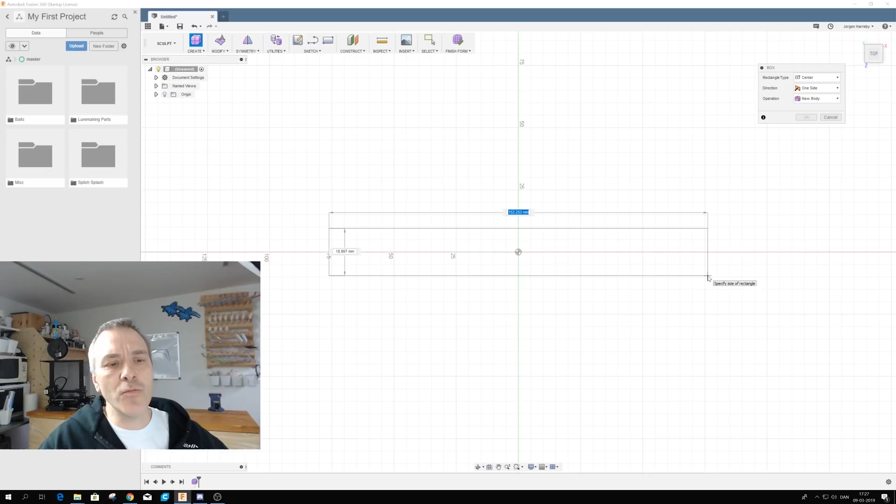Okay, like that. The reason it should be the size of the lure you want to create is that you can scale up and down, but if you make the details on the lure and scale too much down, they might end up too thin to actually cast. So it's a good idea to make them in the size you want, and then afterwards determine if it's possible to scale up and down, or maybe change the design a bit so you can scale it down to the right size.

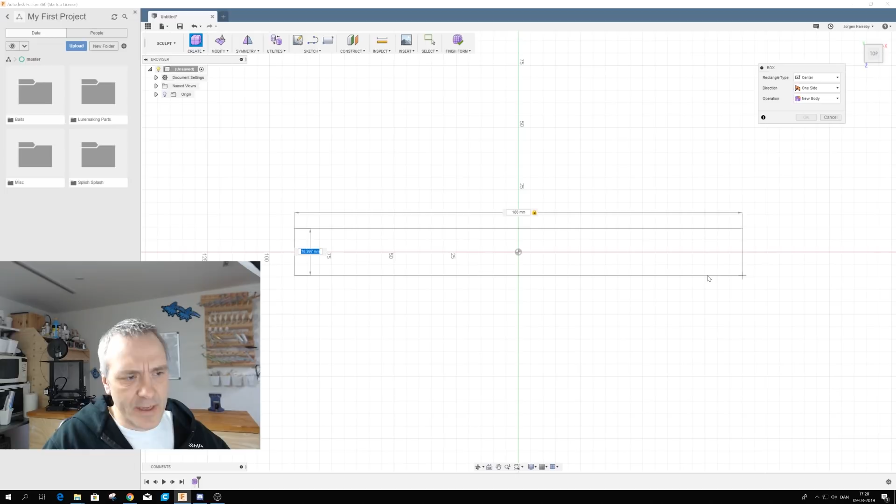For this lure, which is meant for pike fishing, I actually want it to be around 150 millimeters long, but as I need to reduce part of it along the way, I'll start out with a shape that is 180 millimeters long, and the width should be something like 20 millimeters, I think, for starters anyway.

Okay, and once I've selected those two, it will actually draw my shape here, and it will allow me to set the height, and I'll just set that to 20 millimeters as well, like that. Then I'll go to the property box up here.

As you can see, it has the measurements I just entered, and it also has something about faces. With faces, it's talking about the sections of the lure, the sections you can manipulate when you are shaping it.

One thing you can see is that the more sections you have, the more details you can add. The less sections you have, the easier it is to obtain a nice smooth shape. So you need to figure out where in between you want to be.

With a lure like this, I will start out with, I think, 10 length faces. In the width, I only need 2, as I just need the 2 sides, and I don't need that many details in that direction. The same goes for the height, so 2 on each of those.

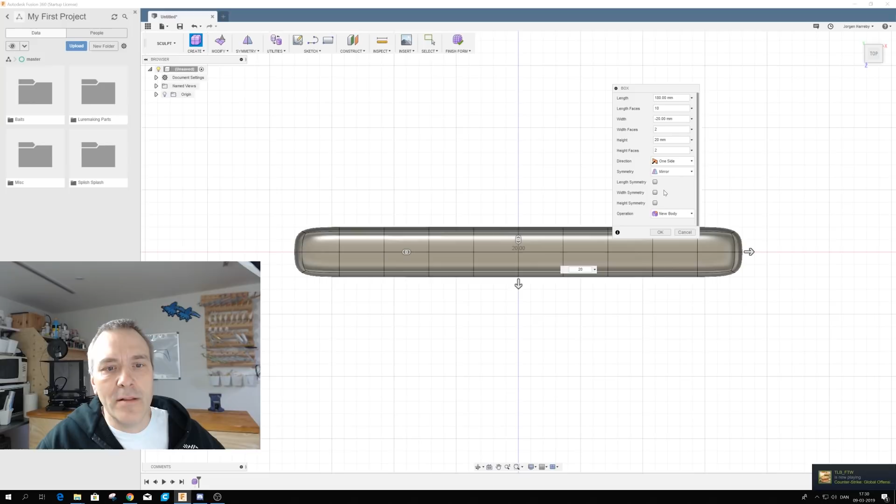Then there comes a very important part, which is to add some symmetry. Its only choice is mirror, and I need the lure to be mirrored so both sides are the same, and that is what's called width symmetry. As you can see here, it has now added a green line down the center of the shape, and that means that what happens on one side will also happen on the other.

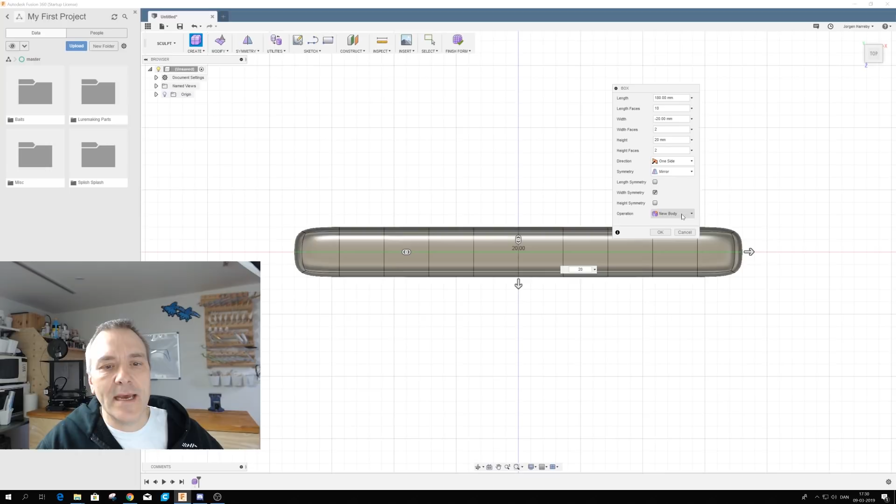Okay, and I need it to be a new body. So now I'm done, and what I have here is the starting point for my lure, the thing I can shape. So this squared cigar is ending up as our shad. Okay, and now we can start shaping the form here.

The way you do that is that you select something. You can select a single face or a section. You can select two by holding shift down while clicking the other one. You can select the lines, the crossing of the lines here, or you can select entire areas like this.

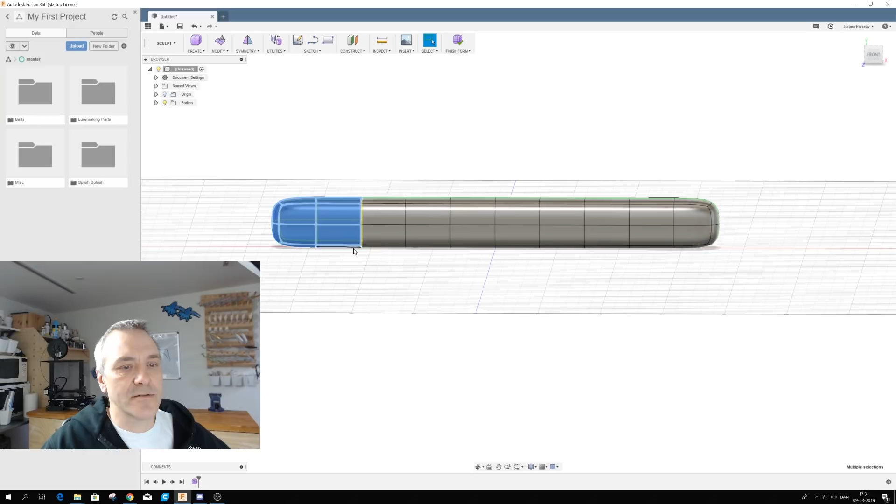Once you've selected something like this, you can right click and choose edit form. This will give you this, I don't know what to call it, an action tool or something you can use to manipulate the section you've chosen. There's a lot of different options, and actually there's probably options I haven't even figured out yet.

But if you just take some of the simple ones, like the arrow, you can use that to pull the section up and down. And as always on computers, you can go back one step by using Control Z. So you can always just try and go back.

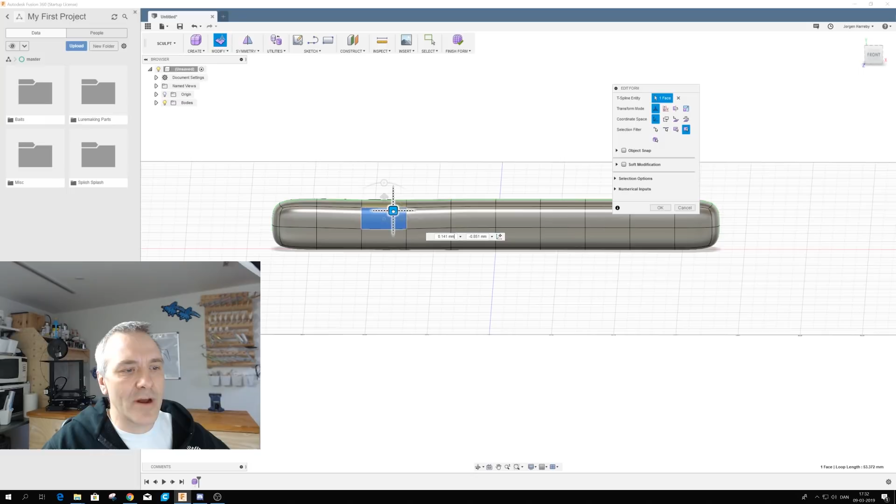You can also move it in the length direction, of course. You can use this one to kind of grab it and move the whole around without reshaping it. There's also this one which will enlarge it, or you can enlarge it in one direction only, like that.

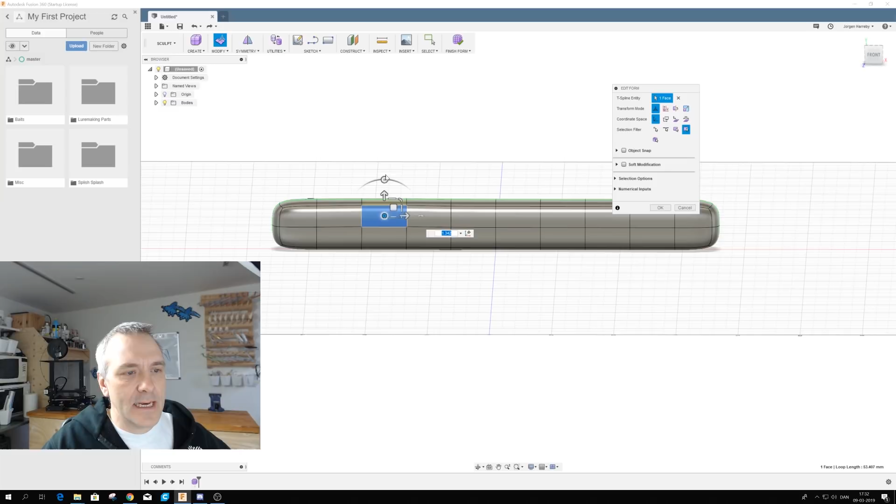And there's this one which is also kind of enlarging it. Some of them seem to work a bit alike. And there's this handle which is twisting it. As you can see, if I turn it around, you can do the same in the other direction.

This is actually a good way of showing how the symmetry works, because if I grab this one and pull it out, you can see it happens in both directions. So I only need to work on one side, and it doesn't really matter which side I work on. I can switch between sides whenever I like along the way. Control Z to go back.

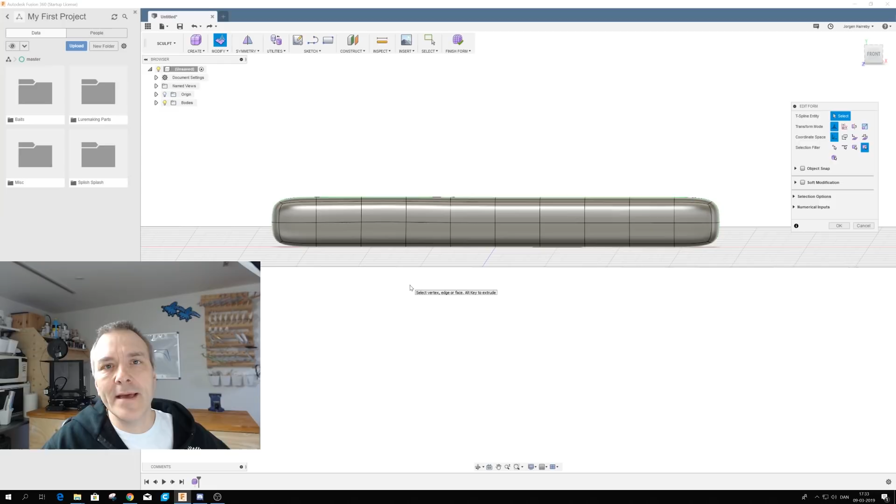Okay, so now we know how to manipulate the shape here into what will be our shad. I'll just move this box out here. And one thing you should also remember along the way is to save your progress. When you've reached a point where you're satisfied with what you have, always save.

This is actually a good point to make the first save, because you can always get back to the save. Even though you save something afterwards, you can go back. So this is kind of like versions, and it's nice to have a starting point version to go from. Okay, so I'll just press Control S to save here, and I'll call this one...

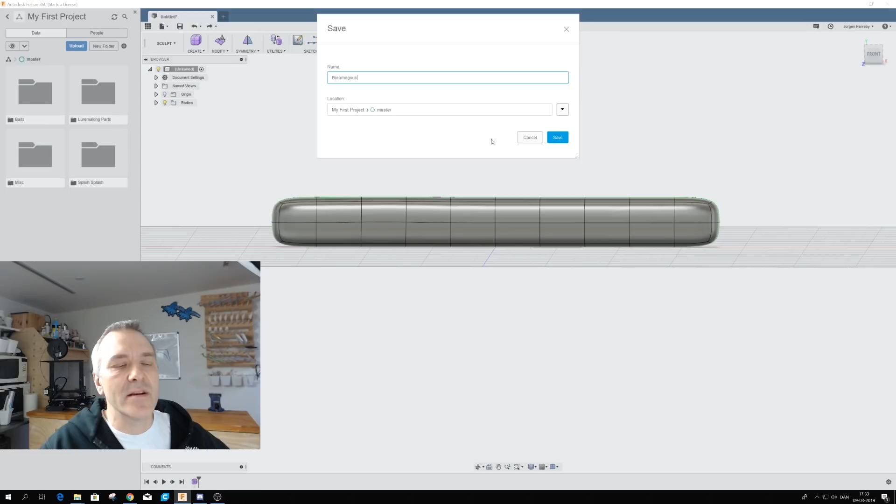As I mentioned earlier, even though I wanted the bait to be 150 millimeters long, I made it 180. That is because I want to reduce some sections of the form here to enable me to make more significant changes in those areas. One of those would be here in the third section from the head, where I want the gill plates to be.

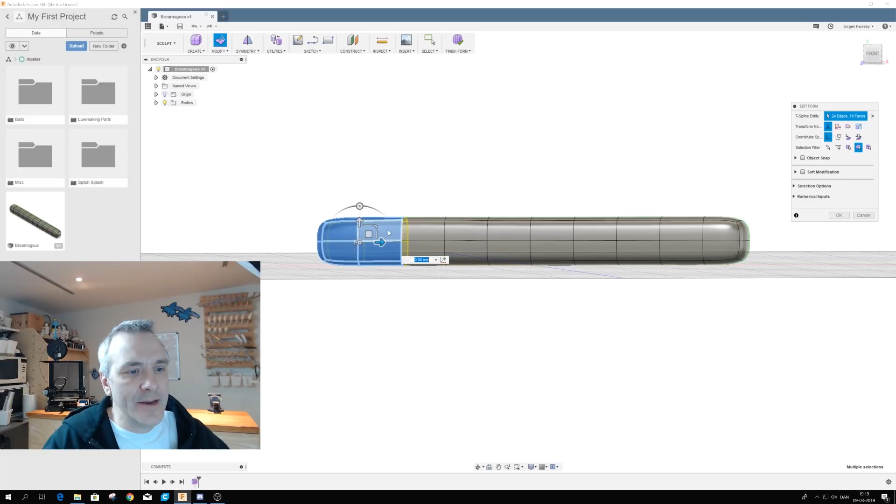So to do that, I'll just select the tip of the head of the bait here and drag those closer to the other one down here, not trying to move it too much up and down, but a little bit doesn't matter. Then also, as you can see, the fourth section was kind of reduced as well, and I don't want that, so I'll just pull that a bit out again.

Then also at the nose of the fish here, I would like to reduce that just a little bit. Okay, and also down at the end where we have the paddle, I will reduce those two sections down there to be able to make more significant changes there.

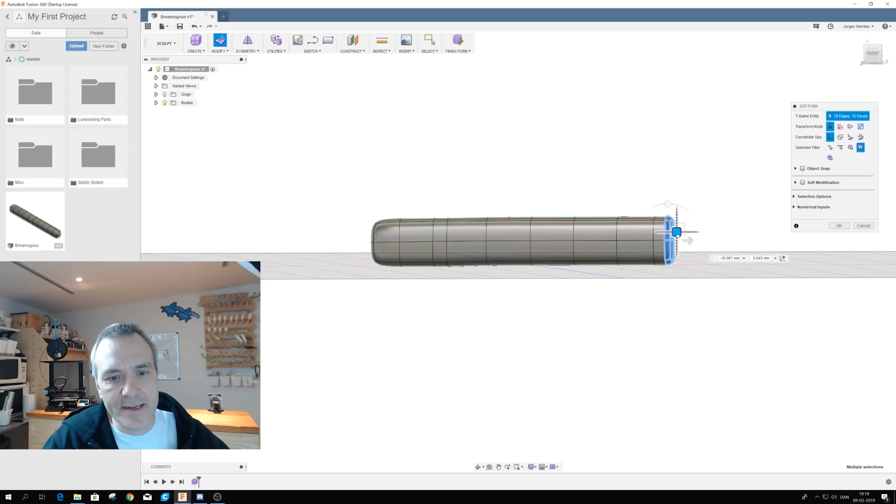So just first of all, this one, like that, and then move those up a bit as well. Okay, so now that's done, and now we can start shaping the lure.

I'll just try to go for a more classic shape for a shad, and then afterwards I'll try to make special changes. So first, let's go for the classic look. It's fairly easy to do.

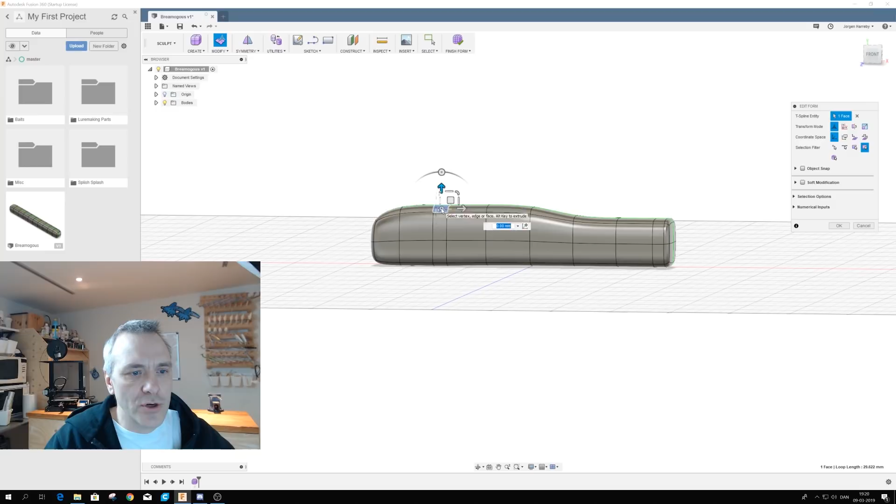First, I'll select a few sections here on top to raise up for the back of the fish - oops, grabbed the wrong section there. I need the arrow, like that. I'll also take the two in the middle and make them go even further up. You can see when the lines are close together, you'll have a shorter distance to bend over, so it'll be a sharp bend there, but we'll change that along the way. Also here at the bottom...

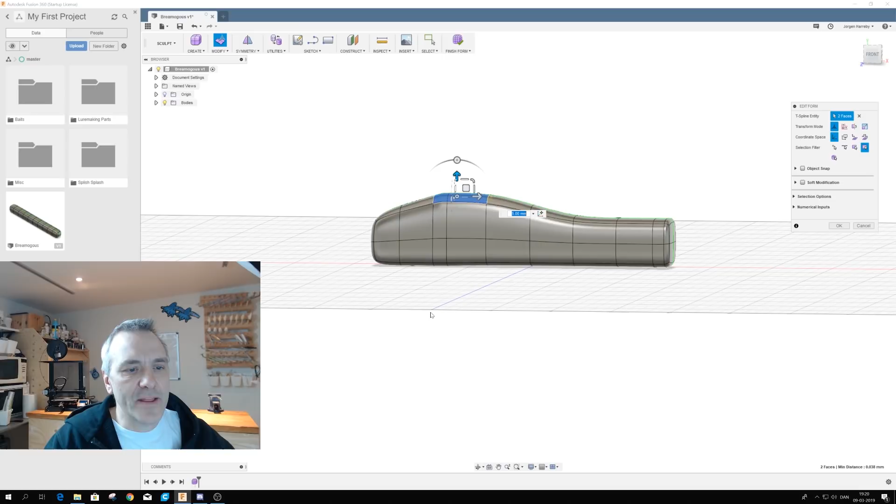I'll do the same, because I need a belly. Move that down a bit. Then I'd like to make a tail, so I'll just grab this and this - no, need to zoom in, not that one. This and this, move those up a bit, and grab all those up here and move those down a bit, like that. Already you can see it doesn't really take much to get something of a paddle here.

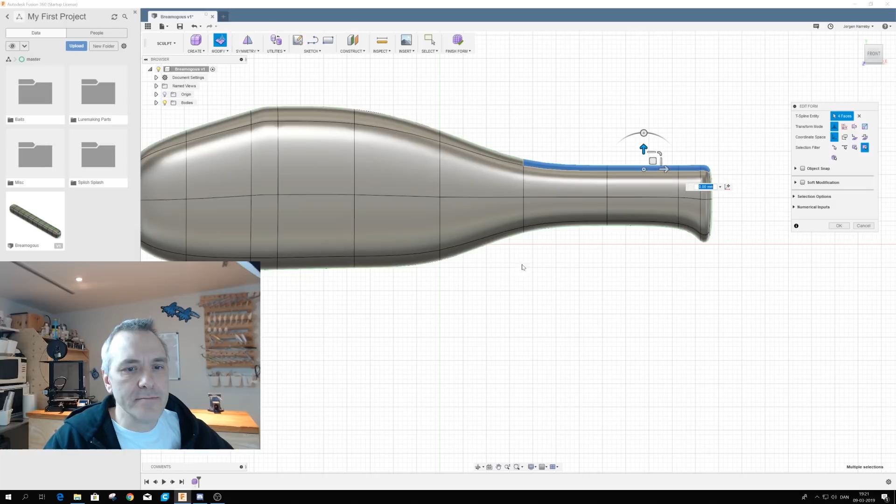So, to make the paddle complete, I'll grab this section here, pull that downwards a bit, grab this one to pull it out to get the right angle. Then maybe grab this one, move it a little bit closer here, like that. Okay, maybe a bit too thin. I can grab this one, make it a little bit more fat, like that.

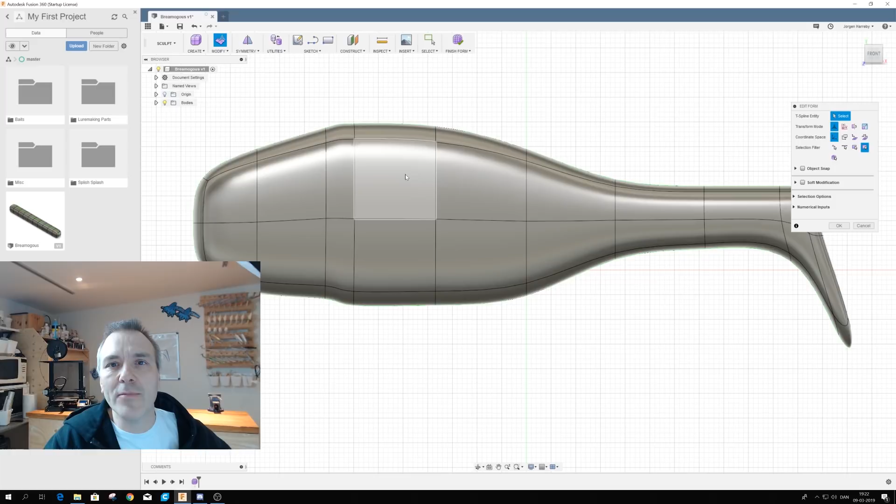I'll just start moving around a bit, trying to get it to look like the shape that I want. This is a part I think we should fast forward a bit over, and I'll get back when I get to something more interesting again. So let's just see here.

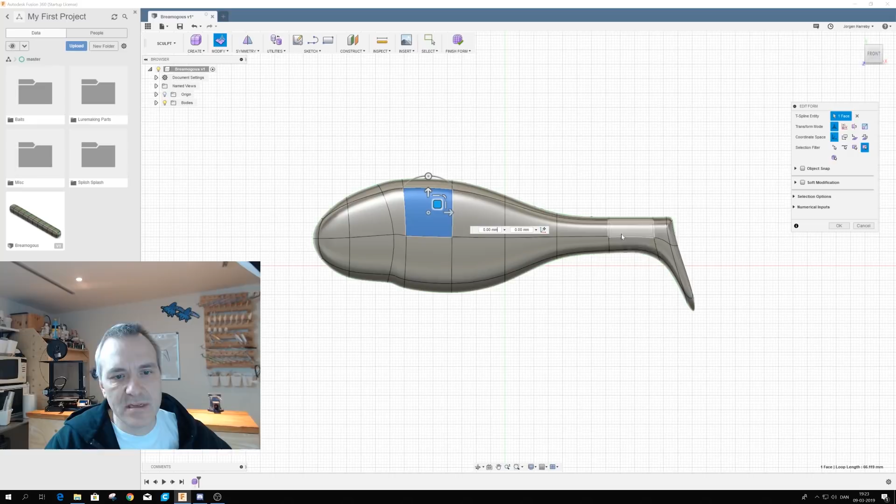Now I'd like to try to make the gill plate here. First, I'll have the lines around these sections more or less follow the track of how I want the gill plate to be shaped. So I'll just grab this one, pull it a little bit back. Also this one should be pulled back, this one maybe a bit upwards, like that. Then we need the gill plate to go out a bit, so I'll pull that down while pushing this in a bit.

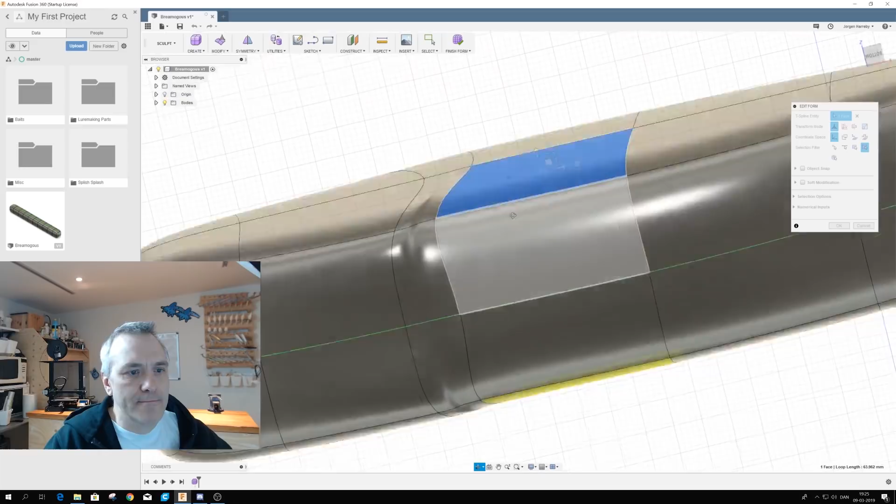This one I will try to push in while pushing this one a bit out, maybe moving a bit downwards to create that. It's really just like moving around with the clay. As you can see, doesn't look all bad. I think I'll just move this... Okay, so now you can see you have a nice line that resembles the gill plate at this section.

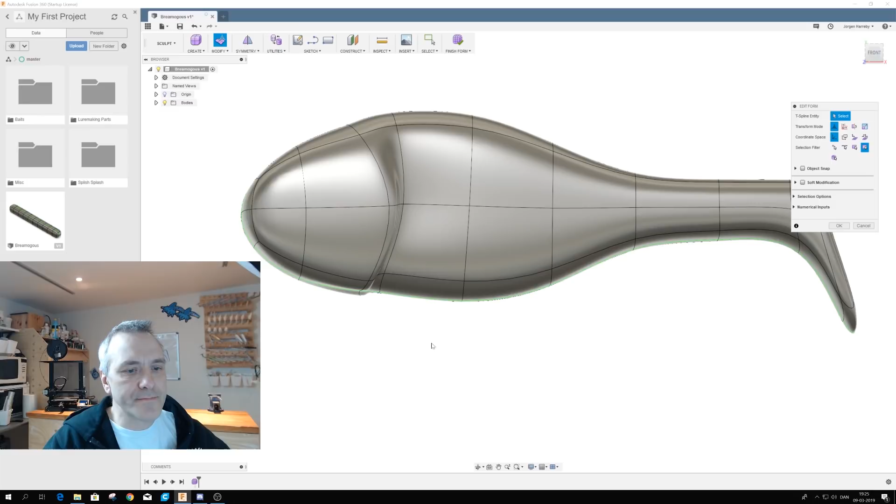Apart from around the gill plate, when you look from the top down, you'll see that we still have more or less the square shape up here. So now let's work a bit on that.

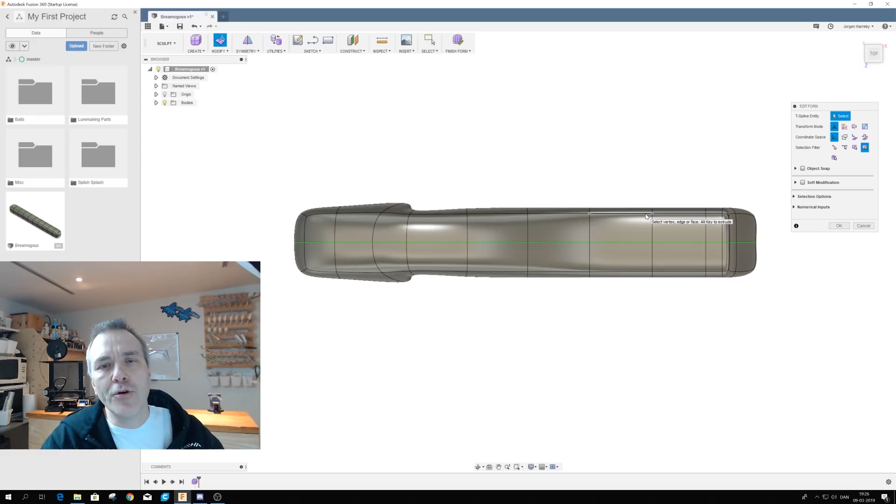Before I do, I'll just say that generally when I work, I try to do a little bit of work in all areas, because if you try to get too finished at one point, then when you work at another point, you'll end up ruining the first. So it's a good idea to work a bit on each place until you slowly move towards the final goal on all areas at the same time. I don't know if that made sense, but anyway.

Okay, I'd like to make the tail, so I'll grab these four sections here on the side, and looking from above, I'll push those in. As you can see, it very quickly becomes quite like a tail from here. I'll just have to evaluate on the thickness of that.

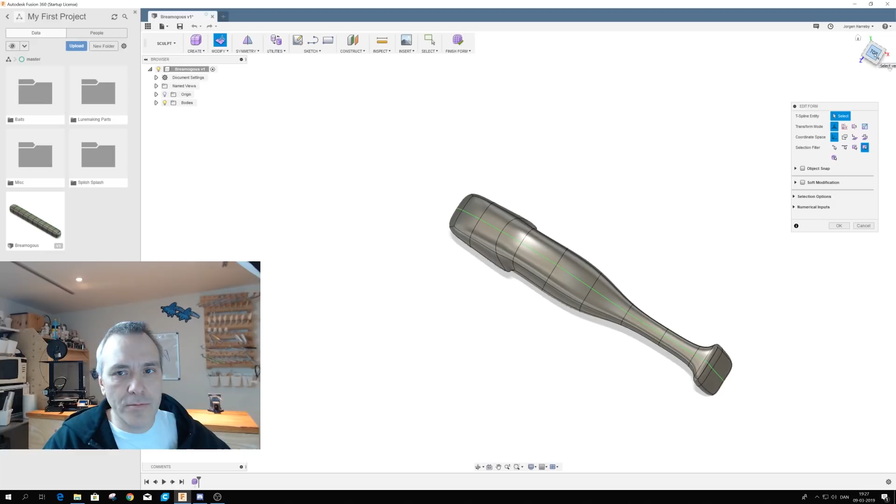Also up here on the nose, it looks a bit strange, so I'll grab that one - no, this one and this one - no, this one. Move in here and push that into the bait to create a nice round nose here. Sometimes it's just a bit hard to navigate here. Okay, you can see it's already looking a lot more like a fish shape. I think the tail is still a bit thick, so I'll just grab that.

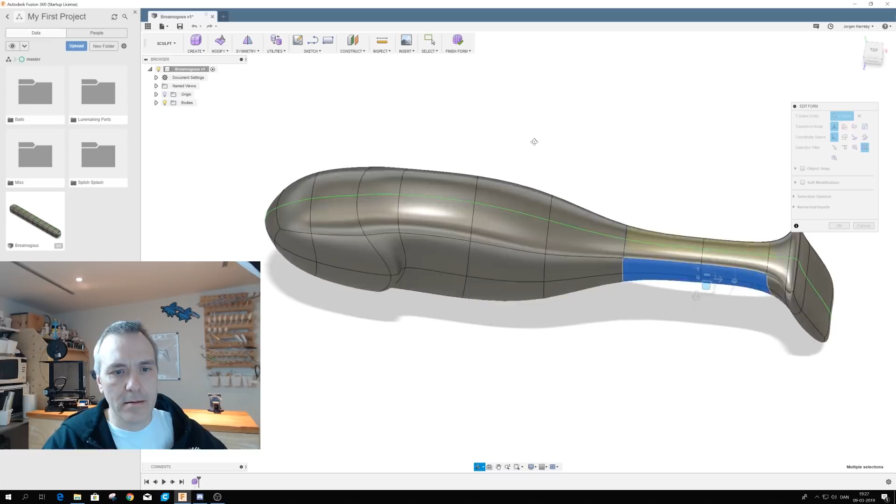Okay, so one thing - when you look at it this way, it's actually still kind of a square, both in the body shape and also the paddle. So let's just work a bit on that.

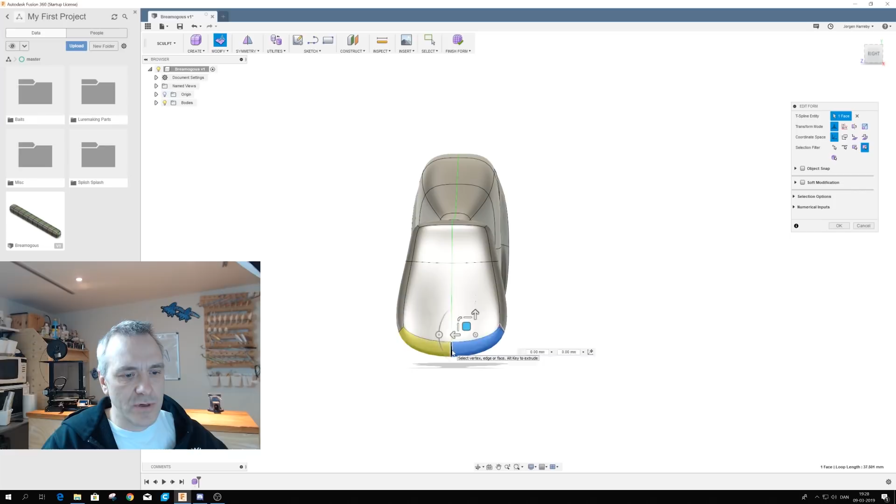Down here, I'll grab this line, pull it out a bit, maybe up a bit. I'll probably need to adjust the size, and I'll choose this one as well. Pull that down to create the drop-like shape. Take the top of the paddle, move that in. Okay, looking nice like a drop now, I think.

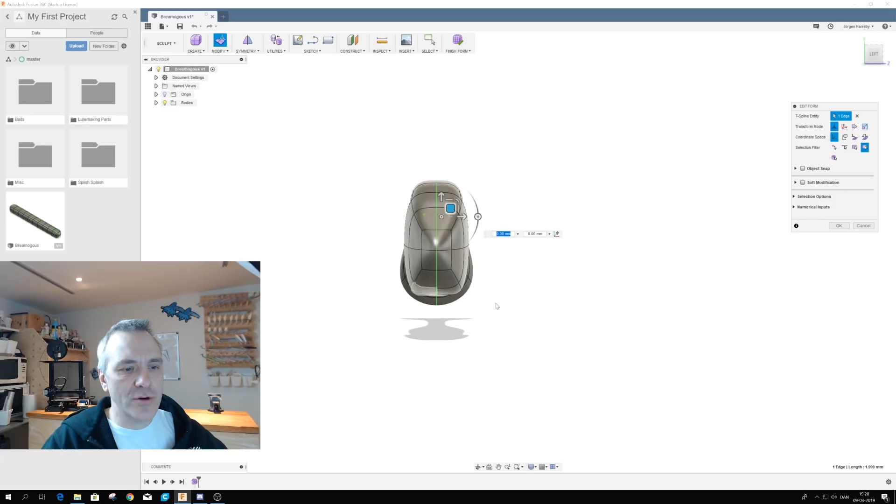I'll just look from here - at this point I must admit I find it very difficult to evaluate the size of it. So often I end up, after the first print, resizing the tail in order for it to be the size I actually want, because it's very hard to see here in the computer if you get the right size compared to the body size. But I think this looks quite nice.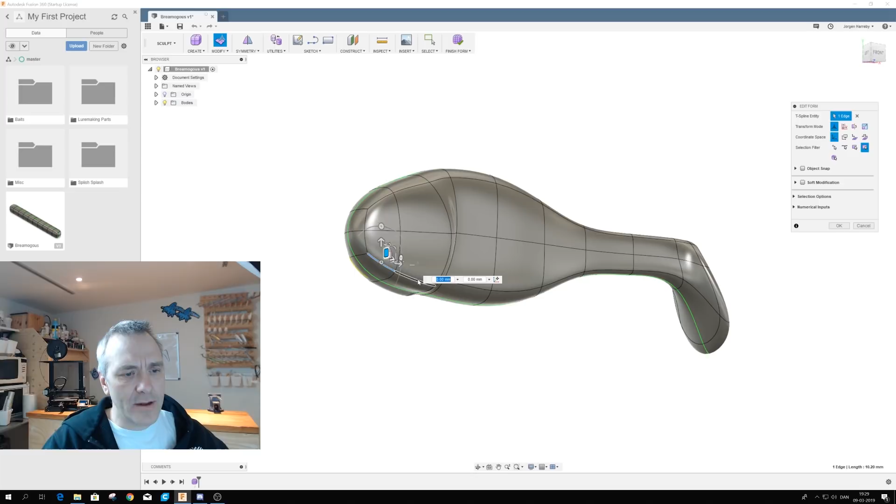Also, as we said, the body is still kind of square as well, so I'll do a bit about that. I'll grab the whole side, this whole line here, down to the paddle, like that. I'll look from below, and push this in a bit to create a more narrow bottom than top, which is what I actually prefer. So you can see now it's a bit more adjusted, and I'll do the same at the top to round the back a bit.

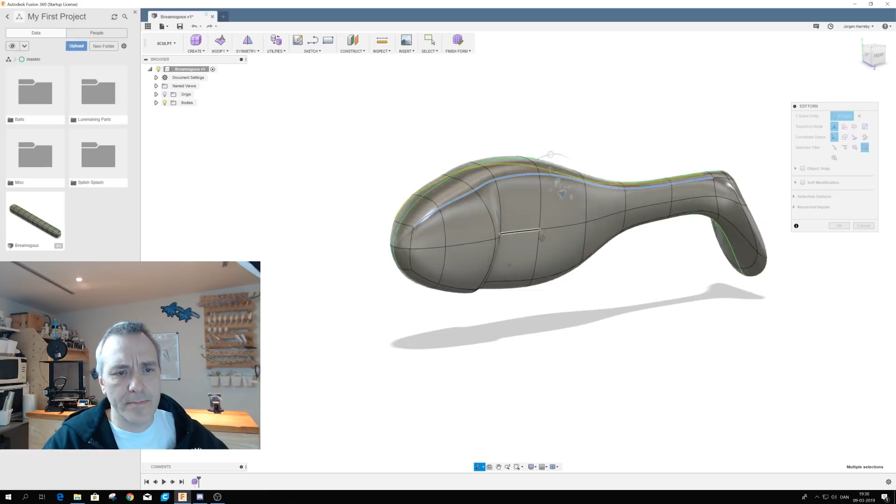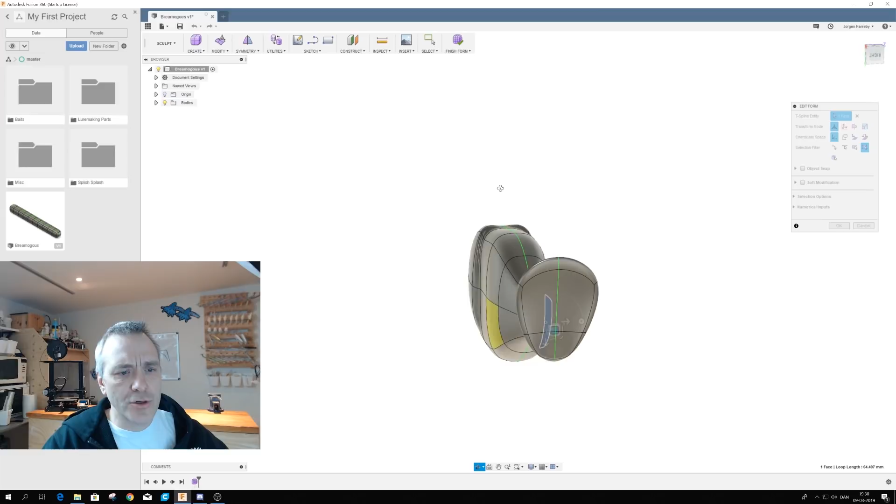Maybe push it down a bit like that. Yeah, and actually here at the head it looks quite nice - it has somewhat of a W shape here. The belly, of course, should be more round, so I'll grab this section and push it up a bit.

Well, I think this is a point where I'll just be working without speaking, because this involves a lot of small adjustments to get the actual shape, and I think you more or less generally get the idea of how this is done. So I'll just do this without speaking, and we'll fast forward over that part until we get to something exciting again.

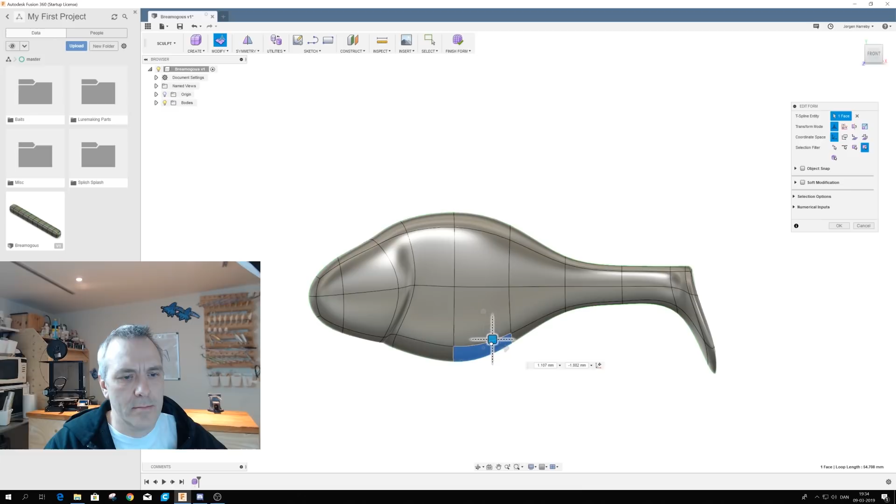I think for now the basic shape of this is more or less finished. I might change it later on, but for now I think this is very nice. Okay, so I'll just do a save once and give it a name so I can get back to that point, and then I'll press the finish form button.

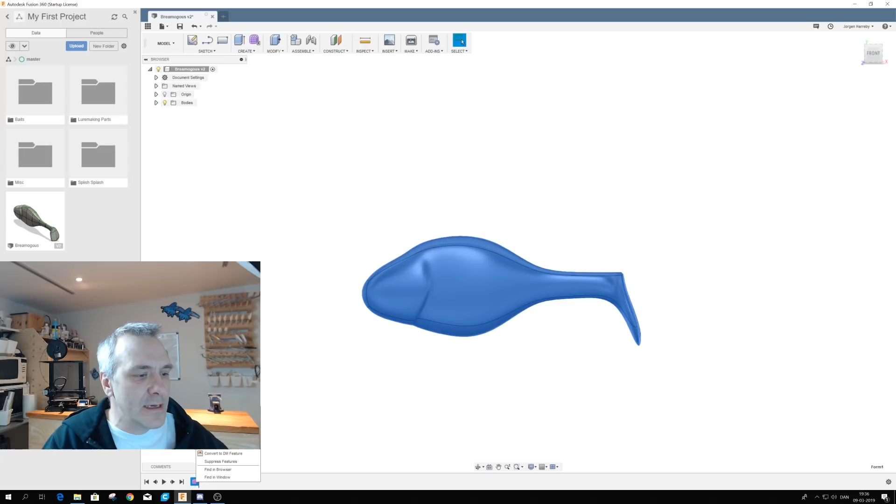And as you can see now, I can no longer handle the shape here, but I can always get back. In Fusion 360, down here you have a timeline, so you can always go back. The way to go back to editing this form is to go to the timeline, where we only have one step so far - making this whole body, which is a big step. But if you right click that one and choose edit, you'll get back into the edit form mode, and you can continue shaping the form here, then press finish form once again.

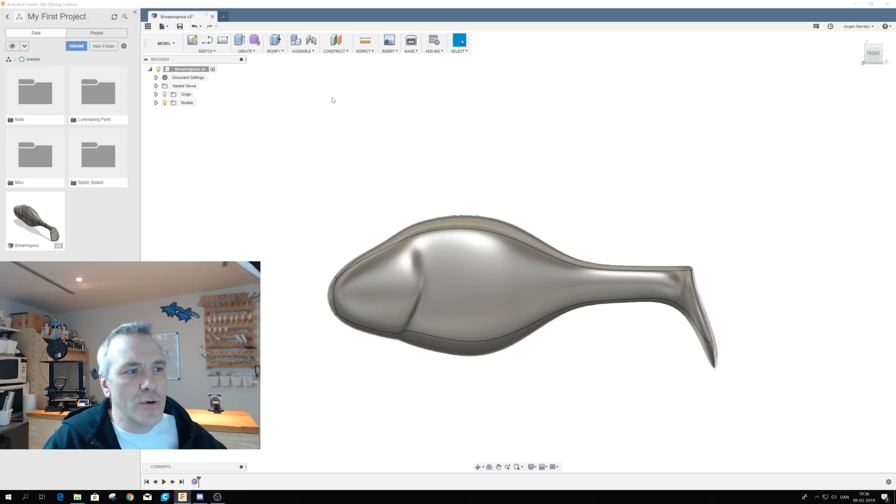And now it's time to add some details to our lure. First of all, I like to have a fin here at the back - I would say dorsal fin, but I'm not sure it's called that on a bream. But let's see anyway. The first thing you need to do is to draw the shape of the fin.

And you do that by making a sketch, and I use a spline here. As always, you should choose a plane to draw on, so I'll go to the front view here and select that one. Then I'll start shaping my fin here - this is a tool that makes kind of round edges.

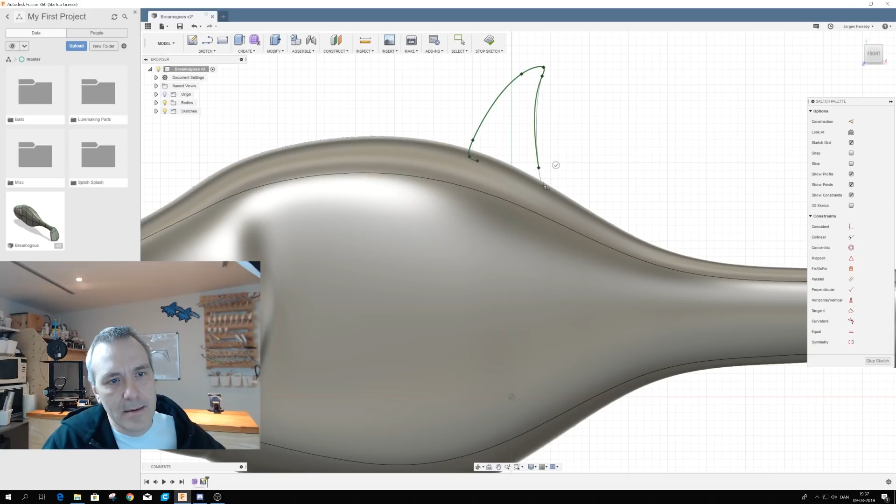When I need it to turn, I should make them fairly close together. Like that - that doesn't look half bad, I think. Maybe a bit too high.

So I'll just edit it. But for now, it's nice - I have more or less the shape I want. So I'll just press stop sketch.

So now, as you can see, if I turn the lure, I actually have something that will end up as a fin going in through the center of the lure here. Part of it will be inside the body, so we won't be able to see it once finished. So now that I've finished, I can finish the sketch.

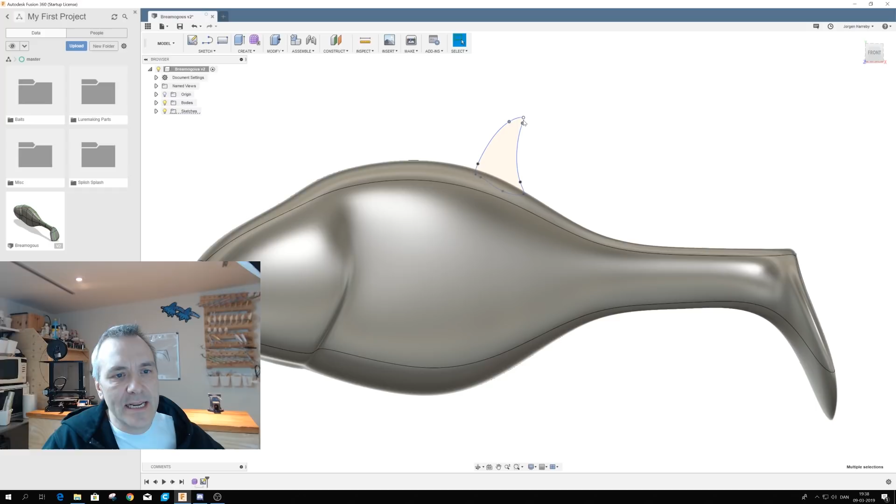I can edit it by selecting sections here. I can select this, or it's harder to select something within the body. To do that, I'll just turn off the body up here, and I can see how this looks.

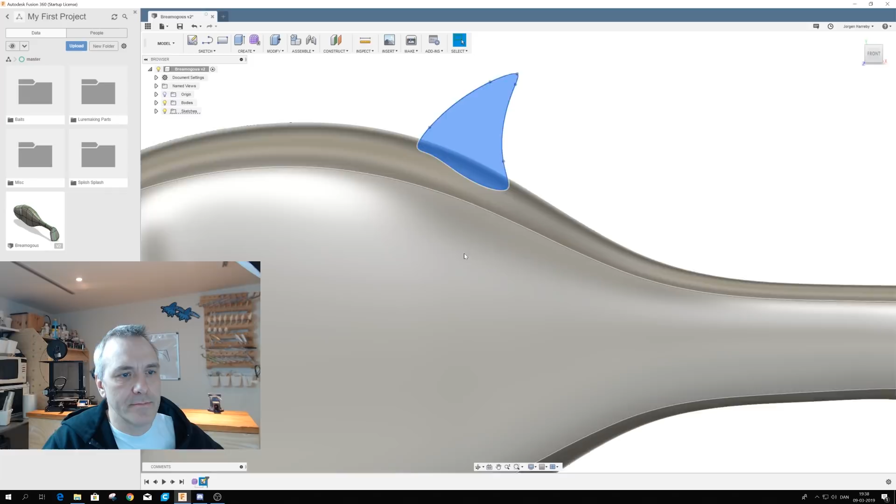Let's start with that. Okay, so now we have the sketch of the shape that we want, and I'll select it if it wasn't already selected, and press E for extrude.

It will then ask me how thick it should be, how much I will extrude it, and I like to extrude it 2 millimeters. I'll go to the property box and say I want it to be 2 millimeters on both sides. It was symmetric I wanted, like that. This will create a fin that is 4 millimeters thick, which is more or less optimal when you're casting it in soft plastic.

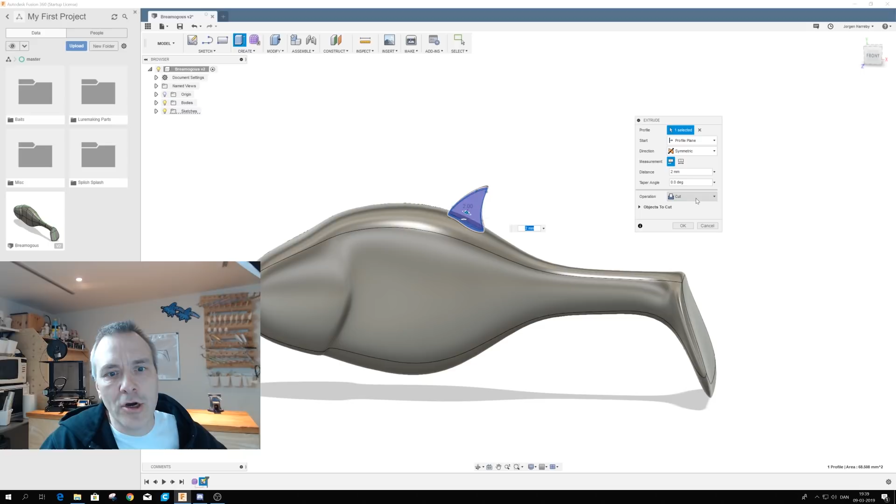So I'll do that, symmetric 2 millimeters, and it's automatically selecting cut. So actually I won't get the shape, I'll just get a hole in the back. I'll choose join instead, and as you can see, it has made a fin up there on the top. I'll press OK. So now we have a nice fin there. Looks a little bit square, but we'll get back to that.

Now it's time for a fin down here at the bottom. I'll do the same once again, and I won't speak too much about that this time.

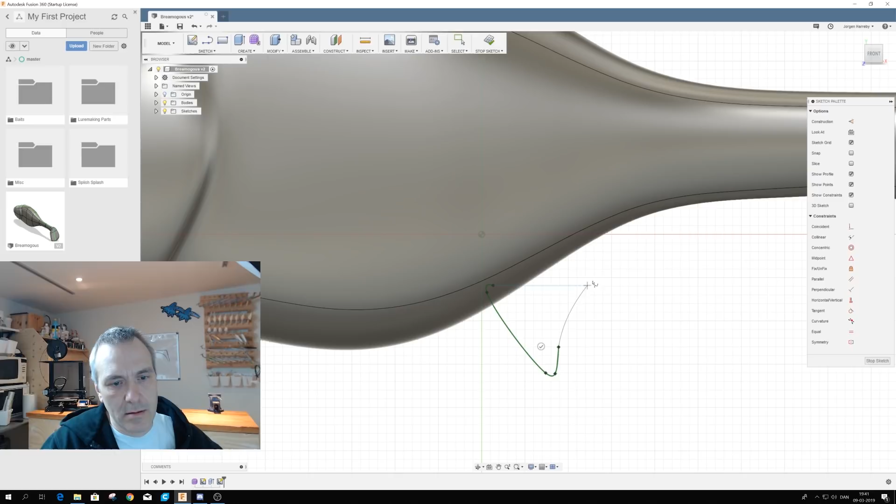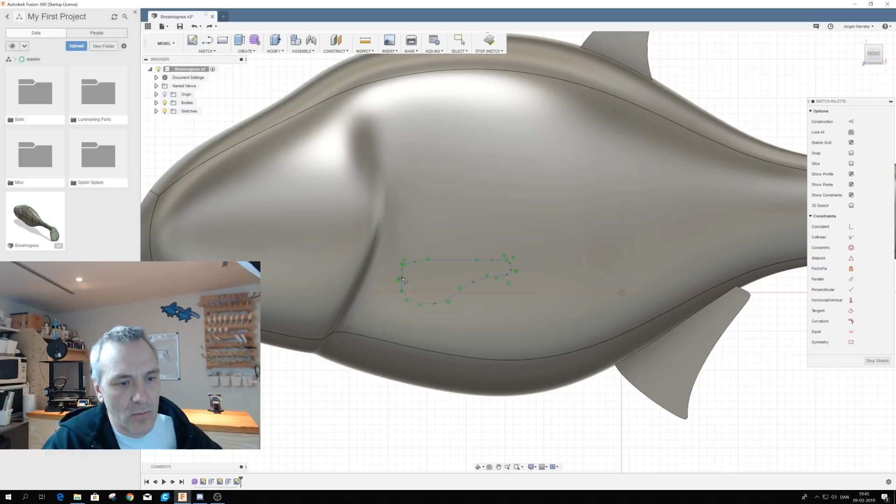Okay, now I'll create the fin here on the side, and as before, I'll start by creating the sketch of it. I'll choose a spline sketch here, and start making that. Something like that, I think.

Stop sketch. And then once again, I want to extrude it, but this time I don't want to extrude it inside the body here, so there's a small difference. First, I select the sketch here, then I turn back on the body again, then I press E for extrude. Instead of profile plane, I select from object and select the side as the object I want to extrude from. Then down here in the distance, I set it to 2 millimeters, and it should be a join, and I say OK.

So if I look now, as you can see, I have my fin sitting there on the side of the body. This time I'll have to do it from both sides.

So once again, I'll flip the shad around, and I'll turn off the body here, and find the sketch again because it's deselected. I'll select that one, switch on the body, press E for extrude.

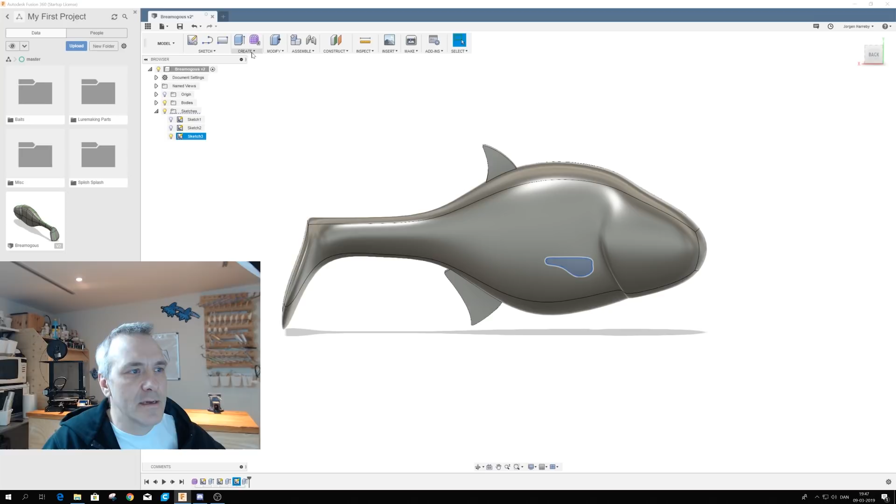Change to from object, select the side of the shad here, and choose 2 millimeters. And as we're on the other side, actually it's minus 2 millimeters, and it's a join, and OK.

So now you can see I have two fins there on the side. I have my back and my belly fin. Now the only thing that's left is an eye.

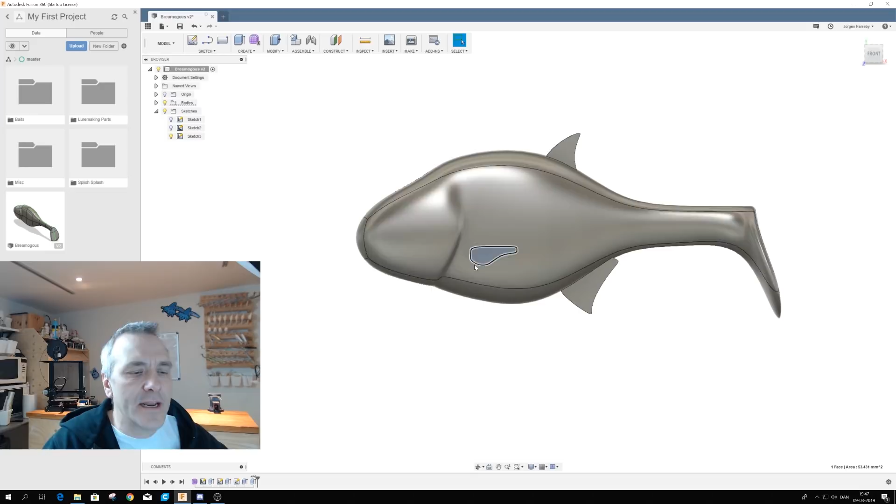So I'll draw that. Now we are ready to make a socket for the eye. I will use that even though I often just paint the eyes on my lures. It's nice with a bit of a socket to make sure that you position the eyes the same place every time. So even though you use 3D eyes or you just paint them, it's nice to have a socket to use as a guide.

And to make this, I'll start out by making a sketch just like the other time. So I'll start with a circle, and position the center of the eye where I want it here. I think this would be nice, and I think 8 millimeters for the eye is nice.

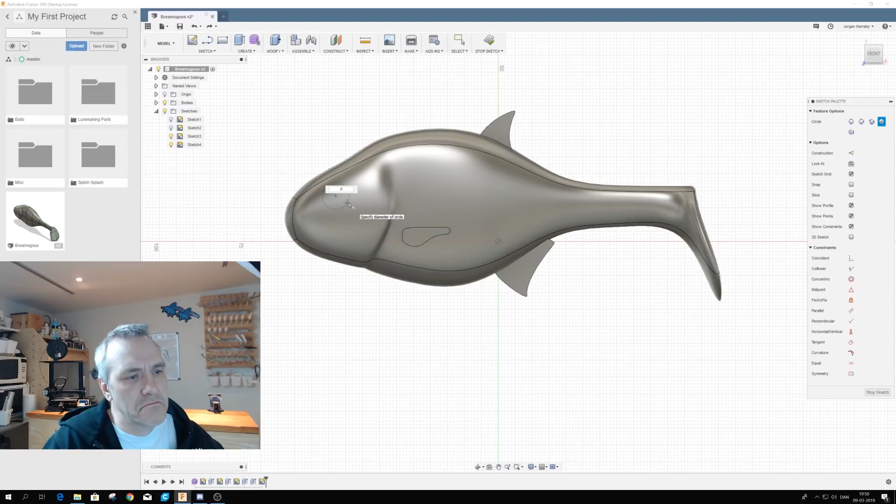Okay, and then I will make a line, because I like those angry eyes. So I'll just draw a line into the eye here to give me that angry look, like this, I think. And then I'll stop sketch.

Okay, you can see now we have the eye here, and I'll just turn off the body, and as you can see now, I can select actually the part that is the angry eye and not the whole circle. So I'll just select that, switch on the body again.

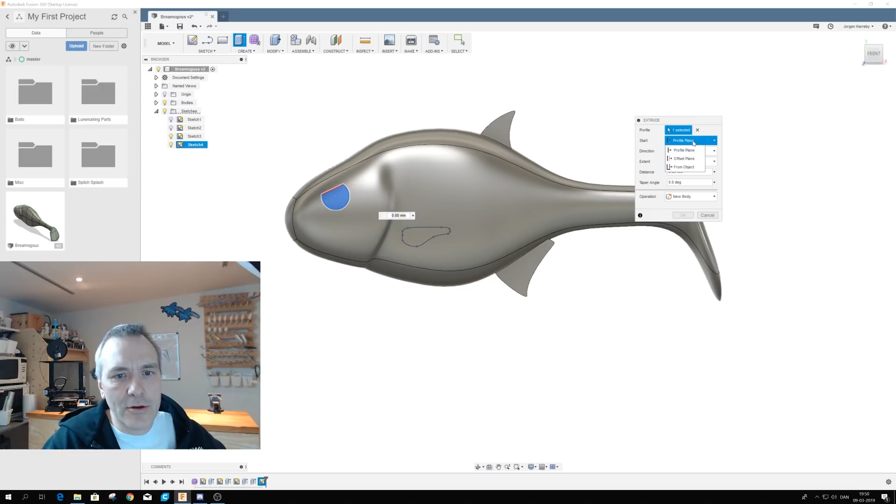Once again, I'll choose extrude, and I'll go from object, and the object should be the side once again. But this time I would like to go -1 millimeter, and that will be a cut. If I zoom in here, you can see that it will actually make an indent of the shape of my angry eye here, which is exactly what I want.

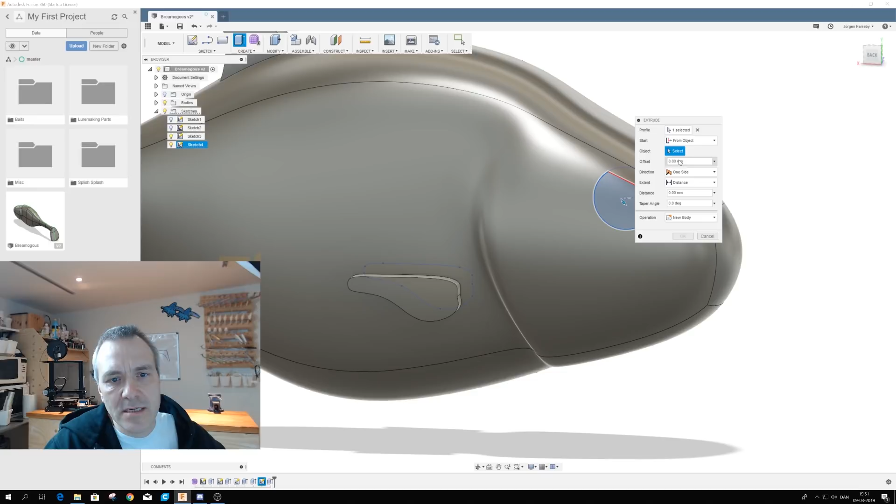Just as before, I need to do that on both sides. So I'll flip the body, turn it off, select my sketch here, like that. Turn on the body again, select extrude, E for extrude, from object, and distance - oh no, this would be the object. Distance should be now 1 millimeter, because it was minus before, and it should be a cut, and yes.

Okay, so you can see now I have nice angry eyes on my shad here.

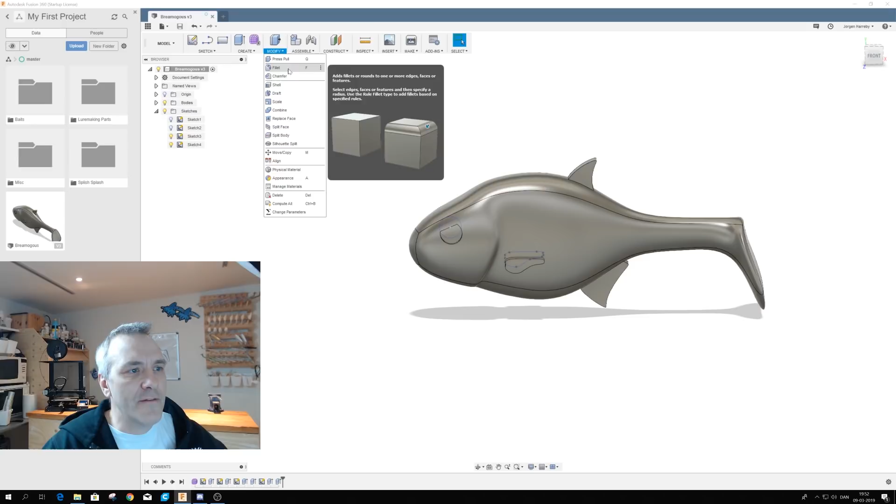Well, as I mentioned earlier, the fins and so on doesn't look that nice, so I'll try to make them a little nicer, using a tool called fillet. Fillet makes round edges, so I'll select the edge here I want to make a fillet on, and press F, and it will ask me the radius of the circle I want to use, and I'm just using 1. Now it has nice round edges on that one.

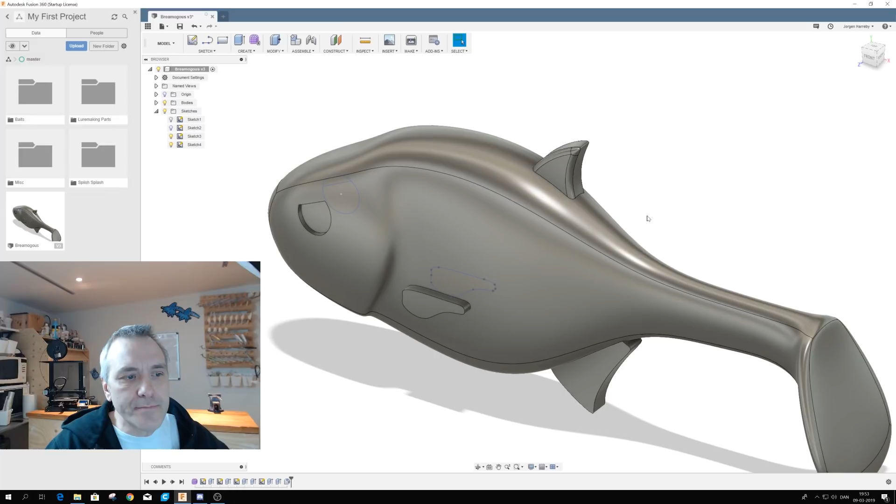So I'll continue that with the rest of them. Okay, and here we actually got an error, it couldn't be done, and I actually know why. It's because the turning in here is so little, it cannot make a 1 millimeter fillet on that one. So maybe I'll try to see how much I should reduce it before it's possible.

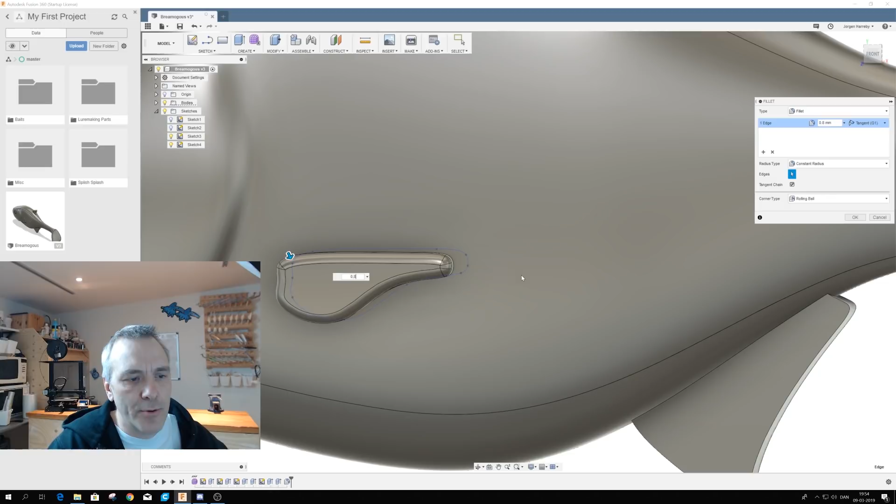So I'll just say 0.8. Well, 0.8 is fine. And here you can actually see that this is the point where you get the problem when you're making a fillet like this. So 0.8, and that is acceptable for this purpose. I'll try the same here. Fillet 1 millimeter, it works.

Nice. Up here, the eye is already only 1 millimeter deep, so the fillet could only be less, but I'll just take 0.5 millimeter. That's fine with me. And the same with this one up here, F 0.5.

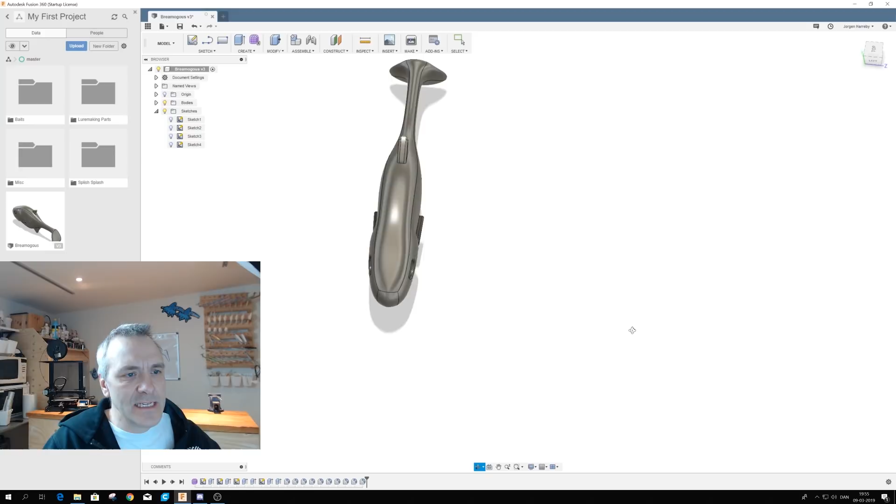Okay, well, I think it's more or less done now. At least I'm so far that I actually want to see a print of it before I go any further, because as I said before, the tail, I'm not really sure if it has the right size. Also, one thing I have tried before is that the tail is actually too thin, and it's a little hard estimating how wide it actually is, if it's wide enough to actually work. So I'll make a print of it now, and then I'll consider if I need to go back and resize it in some way.

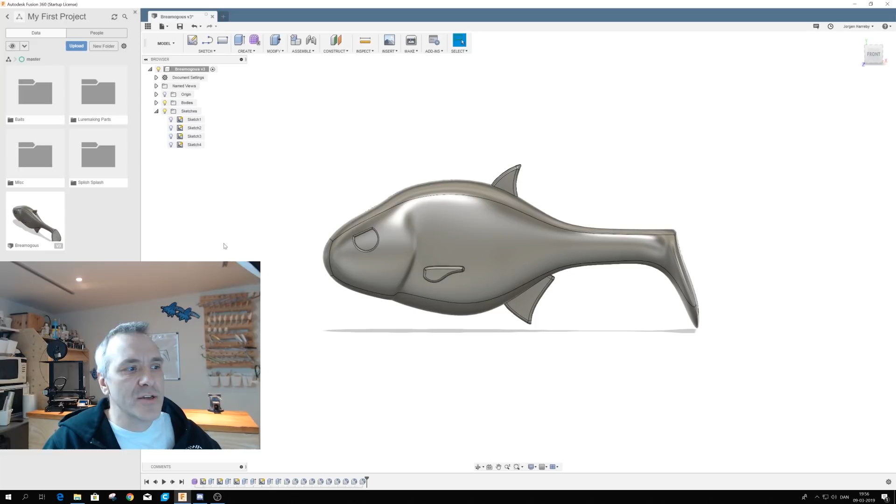Okay, so once again, save, and then we're ready for printing. Before I try to print the shad, there's one thing I just want to do. As printing a round object would require quite a lot of support in the print, which again would require a lot of post-processing, I will start by cutting the shad down in half and placing it on the flat side. This will eliminate any kind of post-processing, and I just need to glue the two parts together and I have a complete lure. So I'll just do that.

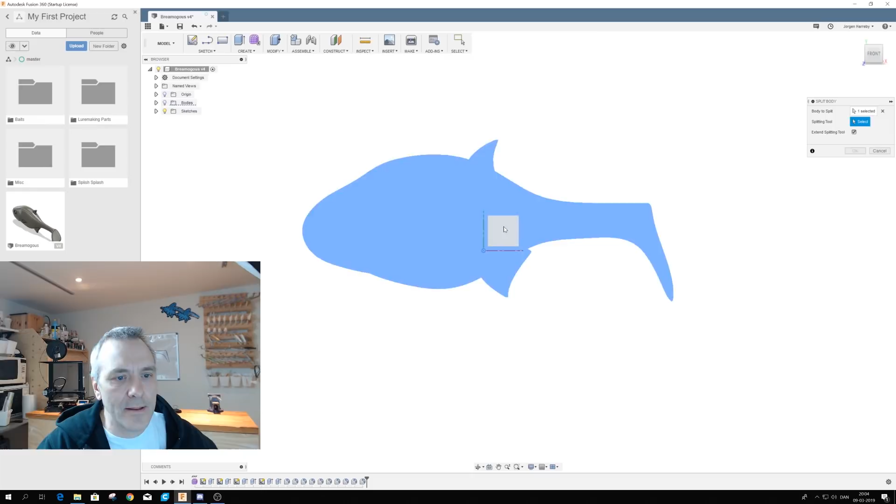And the way to do it is to select the split body tool here. This only takes two choices. I need to select the body I want to split, and then I need to select the splitting tool, which in this case is the plane running down the center of the lure. So I'll select that one and click OK.

And then I just need to turn back the body on again. As you can see now, I have a line running down the center of the body here. And if I select one of the bodies, because now I have two, like that, I can just right click it and select move, and I can push it out here.

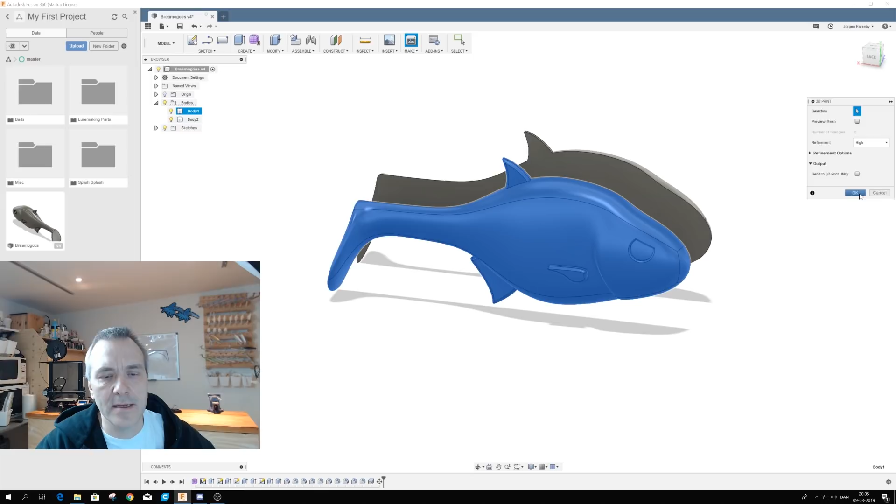Okay, so now I have two half bodies, and I'll make an STL of those one at a time. So I'll select what I want, this side please - don't use print utility, select OK, save STL, and I'll call it Breamingous, and this is the right one. And then I'll do the same with the other one.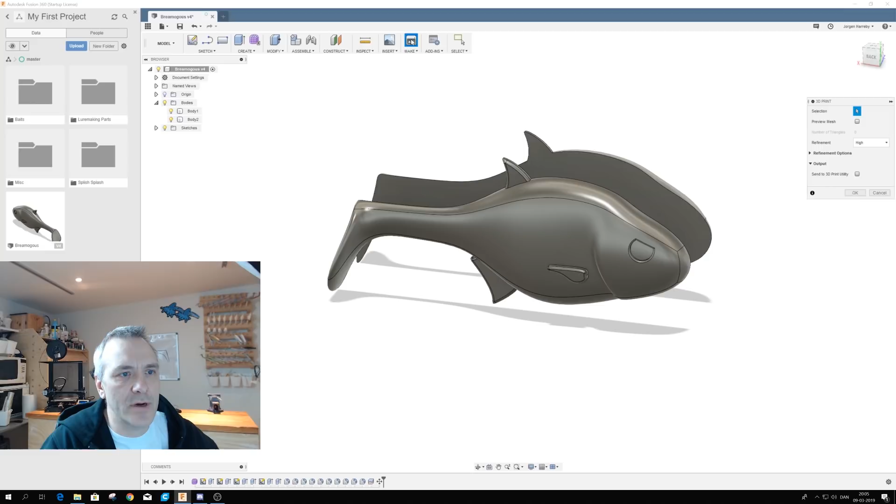I ended up printing out both sides of the shad here, and have now glued them together just with some 5-minute epoxy. And I must admit there's a few things I'd like to change about the bait so far.

First of all, as I said before, I wanted it to be 15 centimeters, and apparently I've reduced it a bit too much while working, so now it's only 13 centimeters, which isn't enough. So I'll try to enlarge it a bit, but I won't just scale it up, because the fins up here actually have a very nice size as they are now. If I add another 20%, it will add 1 millimeter more thickness to the fins there. So I think I'll just reduce those a bit while enlarging the rest of it.

Also, the tail in general is, I think, too thin. When fishing pikes, you have to consider the teeth of those. So I will make that at least maybe more or less double the size, though of course the first 20% will come from enlarging the lure.

Apart from that, I'm quite satisfied, and I think the overall layout of the lure is very nice. Maybe the fins here on the side are a little bit too high. They're 2 millimeters high now, and they seem to stick out a bit, so I might even reduce those. Well, I'll just get back to the computer and make those changes, and you can just join me.

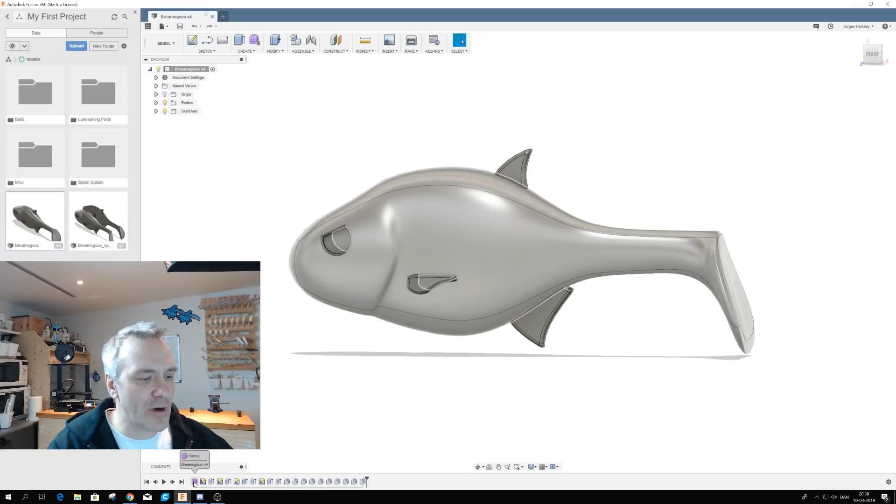Okay, so I start out by right-clicking the form here and choose Edit, and then I can have a look at my lure here. I don't actually want to increase the length here - I'll just prepare the model for being scaled in Cura instead. So I'll make my changes according to the knowledge that the bait will be scaled later on.

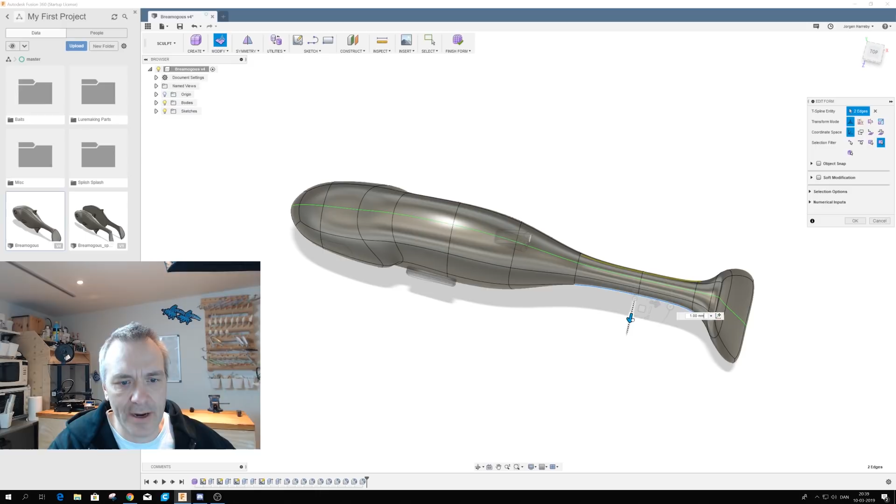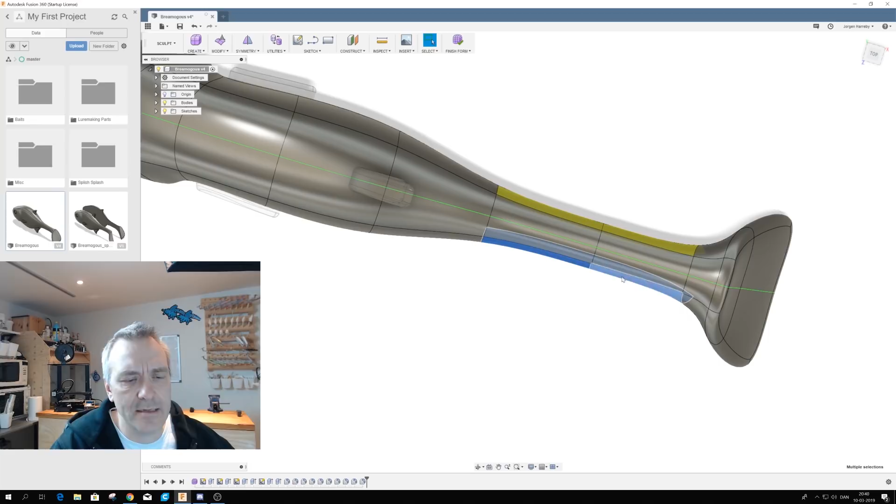One thing I wanted was a thicker tail. So I'll grab - let's see, I think I'll take these - right click, edit form, pull them out a little bit to make the tail more round. I think I'll choose these and then just pull them out 0.5 millimeters. Check this one, 0.5, like that. That will be my next attempt.

None of the other changes I want to make are on this stage, so I just press finish form, and we're just waiting for it to compute.

Then I'll check out the different things, starting with the extrude of the back fin here, the fin on the back. I'll edit that feature - I said that should be 2 millimeters, I'll change that to 1.5. Okay, still no errors, that's nice.

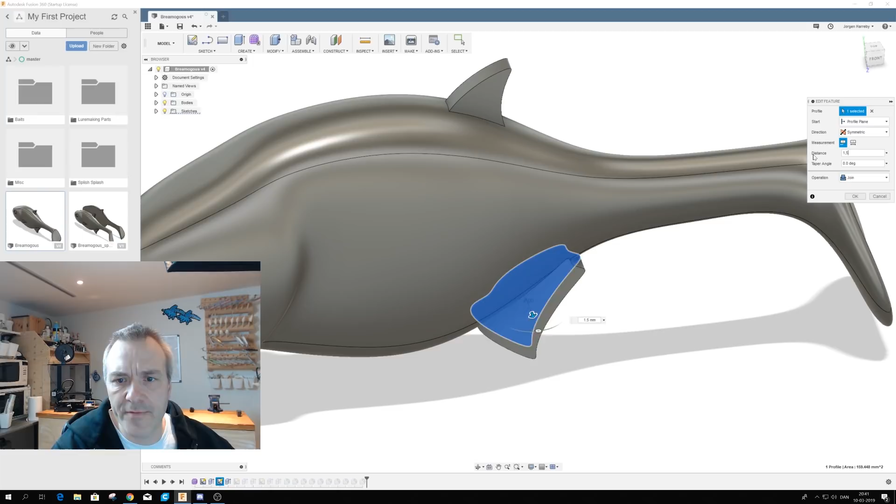This one down here, the same thing - I'll edit that one. Not 41, 1.5, like that. Okay, and that was the eye - the eye was actually okay.

This one, the extrusion of that one - as that was done on both sides, I need to do that twice. 1.5, I think, will be nice. Turning it around - oh, I don't actually need that because I just need to edit this one. Minus 1.5.

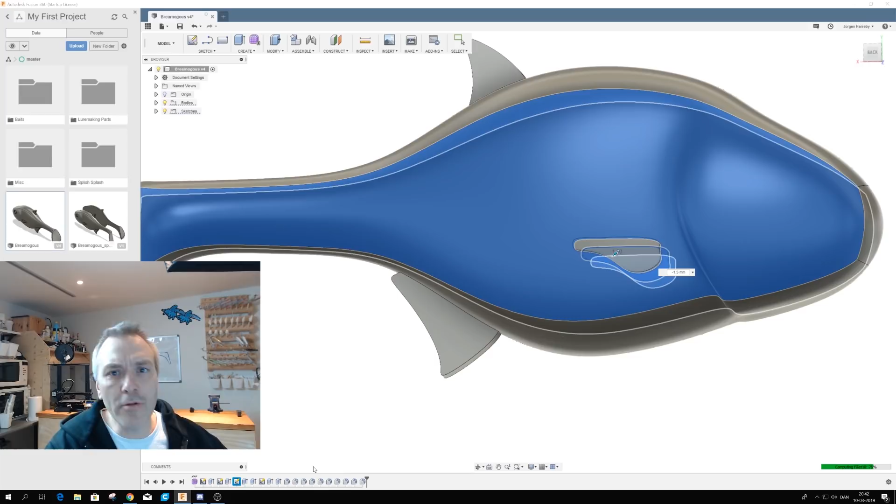Okay, and we got through all the changes without having any errors. If I'd made some changes that made some of the actions after that point unable to be done, I would get an error. But this time it actually looks like everything is quite fine.

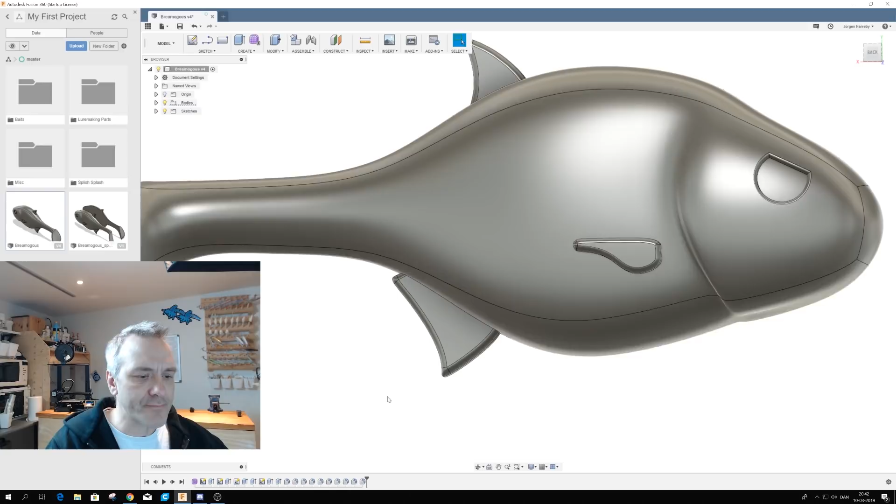There's one thing though, I'll just check. It seems that the tail here is very straight on this part, and I'd like to give it a wider, higher profile at the first section. So I'll go back to the edit and see what happens if I pull up a bit like that and turn it a little bit like that. Maybe I should do the same here, pull it down just a little bit and turn it a little bit.

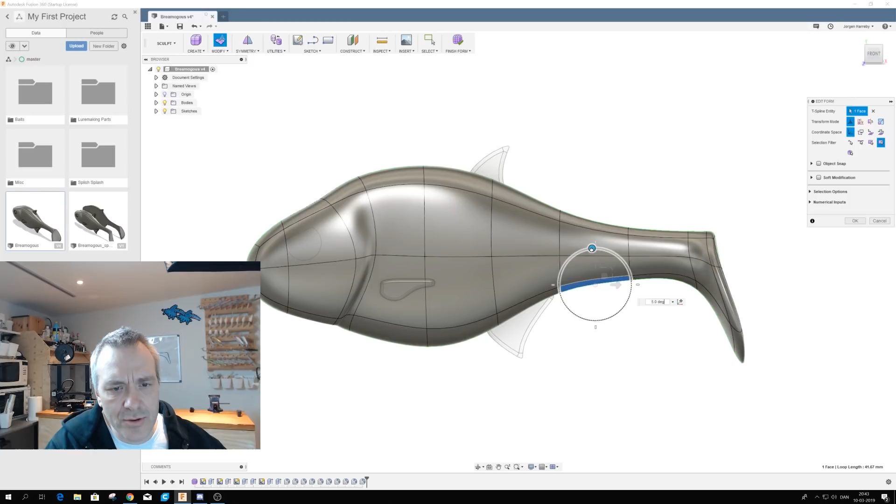Giving it a bit more classic shad shape, I think. But well, I think that looks good. Okay, so we'll just finish from here, hoping that we'll get no errors.

Well, as you see, I got several errors here. There's one here, which is what? Edit feature. Okay, we had that one before.

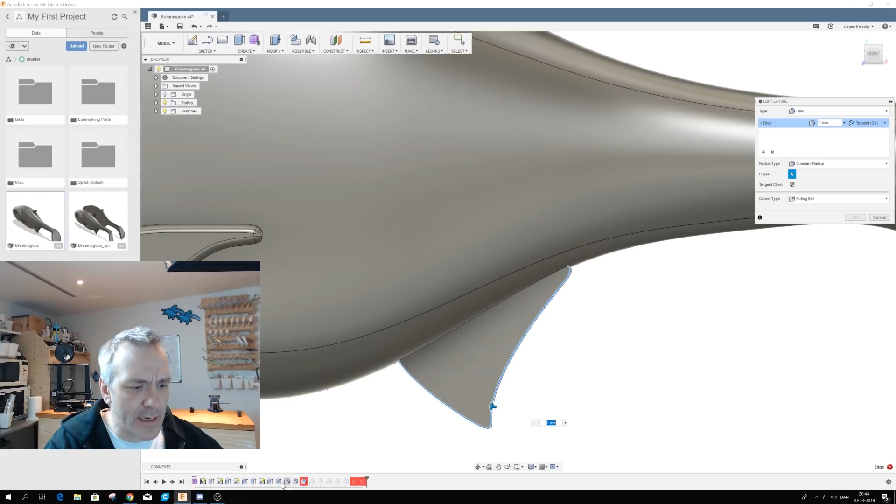Now that I've moved the point where it cuts into, we actually have some errors. So what I'll do here is I'll find that. So you can see now we have some errors down here, and this one I'll just choose edit to be able to see what place it is.

Okay, this is the fillet of the fin here, so I'll have to change that. So I'll just escape out of that and see if I can find the fin.

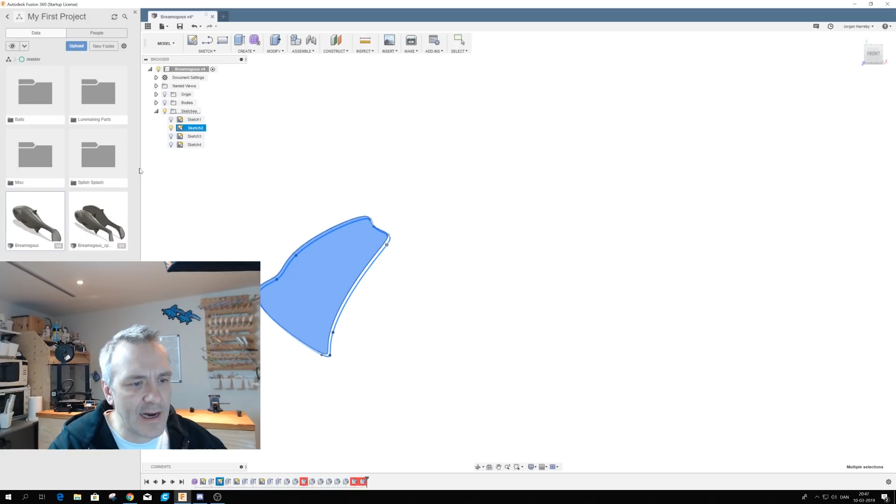Okay, I'll just find the fin up here as a sketch like that, and maybe select those two. It's hard working here with the body in, so I'll just remove that. So I should be able to just move the fin out a little bit, switch on the body again. Still not.

Okay, and as you can see now, just by fixing the fin, I actually got rid of two of the red ones down here. So that seems nice.

Now the fin has a little change down here. And what is this one? So I'll just see what fillet is this one. Edit feature. Well, it's the feature for this.

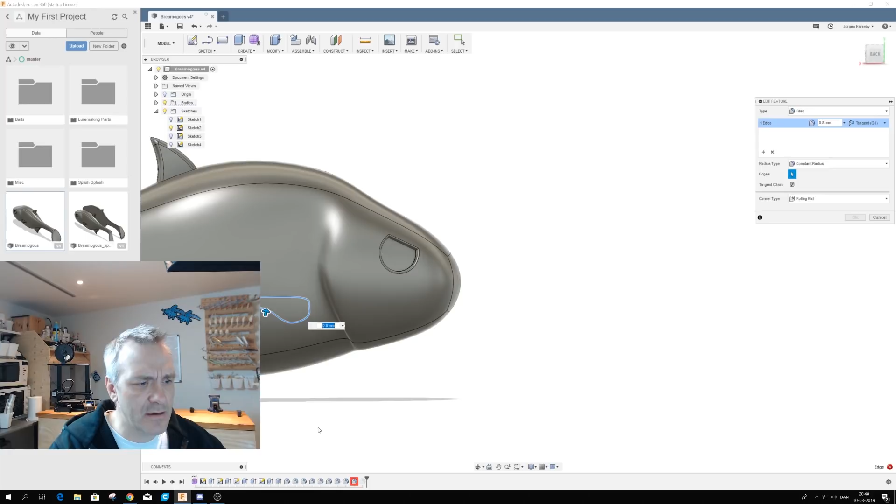And for some reason, one side works, the other side don't. I don't understand that, 0.7 was okay. Well, it doesn't really matter too much to me.

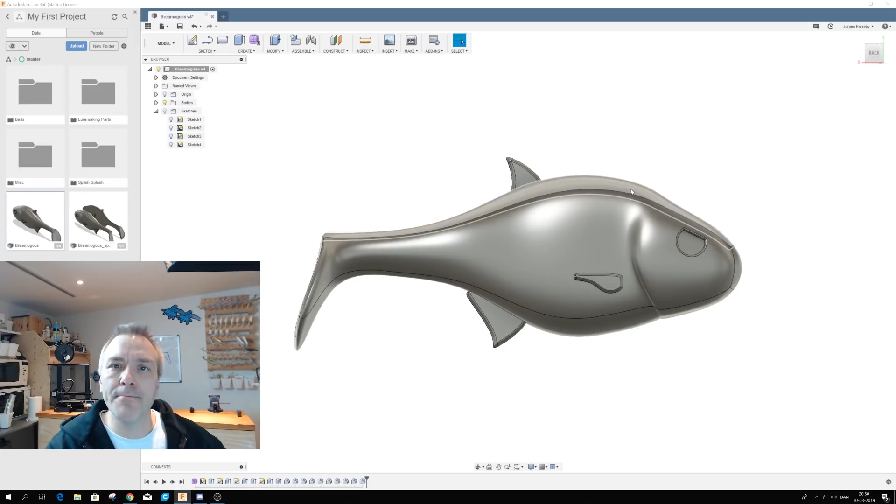So now I have made the changes I want, and I'll just split it up again and make some print files, and then I can print a new version in the right size.

Well, I've now printed out the master with the modifications we made, and I printed it out in 16 centimeters length, which I think is quite a nice size for this bait. Well, I'm very satisfied with the fin's thickness now, and also the tail I think will be working fine on this bait with the new thickness.

So the next steps for this one would be to maybe sand down the body a bit, and then apply spackle and sanding a few times to get a nice smooth surface. Then of course make a silicone mold from it and start casting. But that won't be in this movie, as I think it's kind of business as usual.